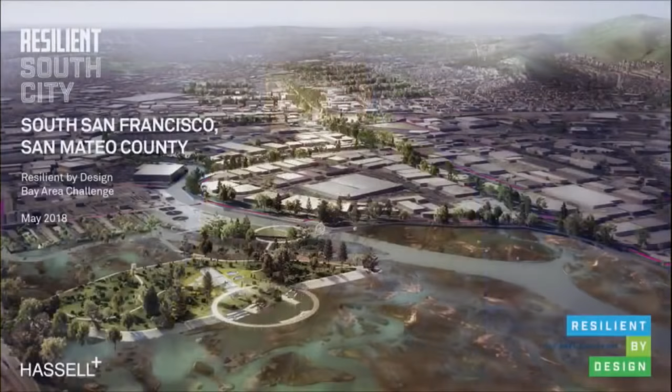We've come a long way. We've come a very, very long way over the last year.

I'm particularly thankful to our amazing team that's developed all the work I'm going to share with you today, and they're going to join me on stage for questions shortly, and I'll be throwing all the difficult ones to them. Also to some of my Hassell colleagues that are watching the live stream in Australia and also in our Asian studios today.

We have together been focused on achieving the inspiring vision that drew us to this challenge one year ago. That vision is really about innovative community-based solutions to sea level rise, severe storms, flooding and earthquakes. Design can only be really effective in these serious problems if it also is improving the daily experiences of people.

There's one team member that couldn't be here with us today because he's in class, and I'm going to let Sultan tell you a little bit more about the project.

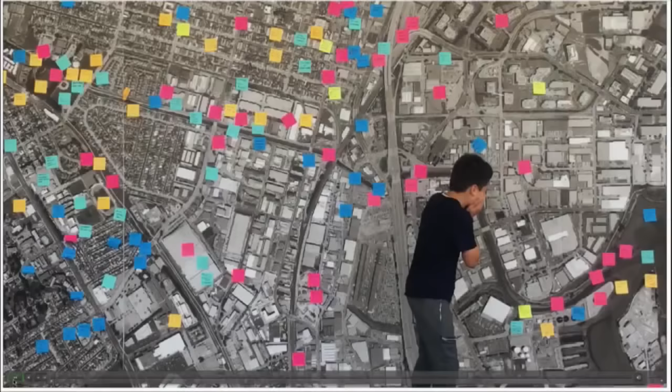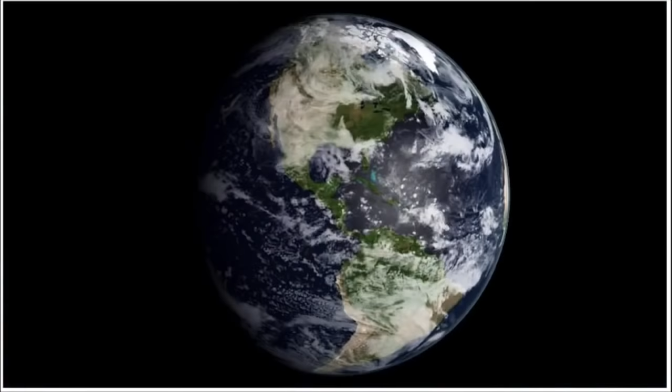This is a story about a little city called South San Francisco, built next to a bay a long, long time ago. A story about this city and that bay, but in a different time, when storms, floods, earthquakes, and other natural disasters were happening more and more often.

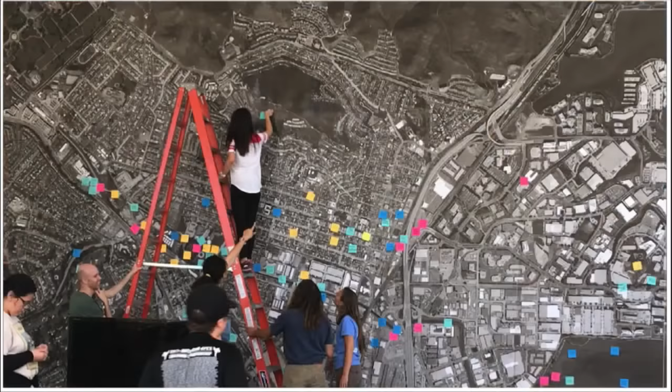A time that would call on all the communities that lived around this bay to share all of their past experiences and make plans for the potential disasters of the future. Together, designing ways to become more resilient, becoming resilient by design.

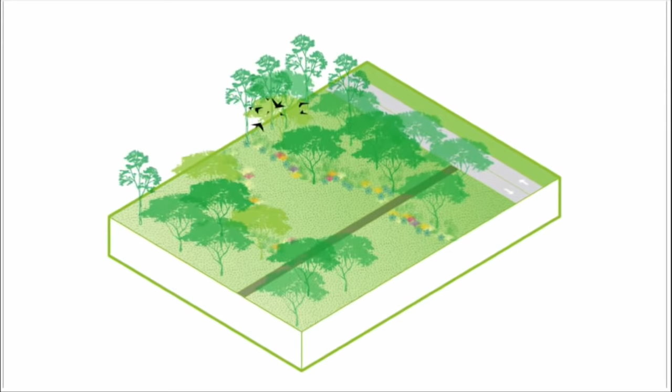And they discovered an answer so simple that they felt like they should have known it all along. The answer was something that they all loved, but sometimes forgot how valuable it could be. The answer was green, and kind of empty, and could be almost anything they needed if they put their mind to it. It was something that made their lives better today, and made them better able to respond to disasters in the future.

Although only one bay, its shoreline was diverse and stretched 500 miles, and at its edge had grown lots and lots of cities, some big, some small, but all connected by that one bay. And to find their solution, they first tried to better understand their shared problems.

So today I'm going to take you through the process, the collective design process that we as a team have been working our way through over the last year.

I'm going to begin by outlining our regional analysis, the process that we went through to understand the bay as a whole and some of the challenges and common challenges shared across the bay.

But then I'm going to turn to South City and the community there, the way that we engaged with them, the ideas that they gave us, the way that they contributed to our understanding of their challenges.

And then after that, I'm going to talk to two scales of the project. In dealing with creating resiliency in South City and Colma Creek, we've looked at the entire watershed, and we've also focused on the most critically vulnerable area, which is Colma Creek.

So we began this process with one of the most amazing site visits that our team had ever experienced. It was 4 weeks of a curated tour of exemplar projects around the bay and some of the most vulnerable sites and communities. And then beyond that was detailed data analysis, identifying some of the challenges brought on by climate change to communities around the bay.

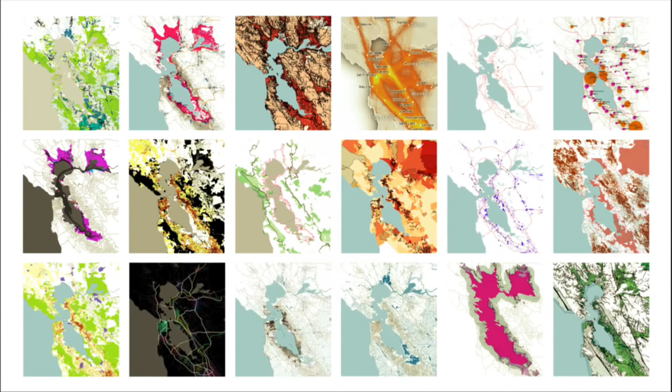But also identifying existing challenges to life by the bay, for some that will be exacerbated by rising tides. We've identified 4 key insights, and I'm going to keep them very short.

Firstly, it's creekside and shoreline areas that are vulnerable, and there's a triple threat: it's flooding, sea level rise, and liquefaction.

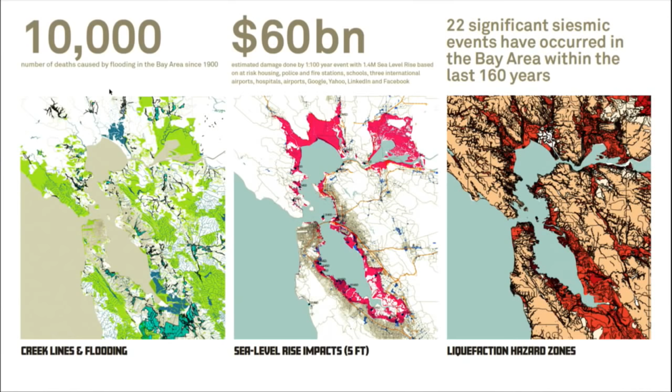So it's clear from the creek flooding FEMA maps, as well as the assets and communities that are at risk by sea level rise and the liquefaction hazard zones, that these 3 risks are all entwined, and they make areas that are particularly vulnerable based on that triple threat as I described it.

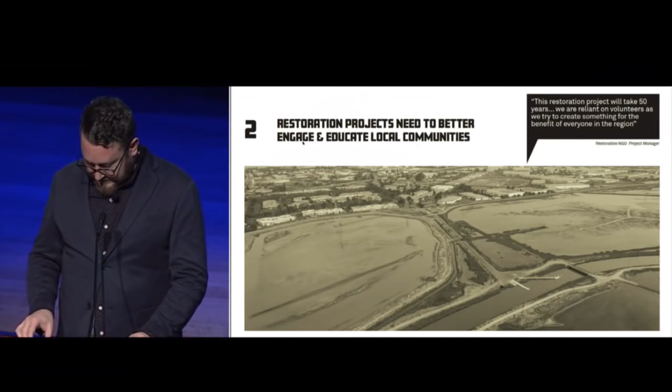Secondly, restoration projects need to better engage local communities and also embrace educational functions.

So we've talked a lot about the Baylands. This is a really ambitious project of a huge scale. At the same time, the population of this region is growing very, very quickly. And the Bay Trail is 500 miles in circumference, and it's really responsible for connecting those communities to that Baylands project. But if the Baylands project, which was created out of a social movement here, doesn't adapt to the new population that inhabits this region, then it will never happen.

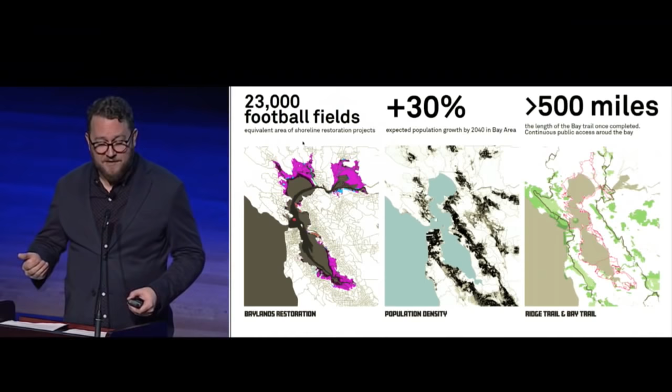And then on top of that, there's sea level rise to deal with. So for us, the key insight is the third one: there's a lack of parks and public access to the shoreline.

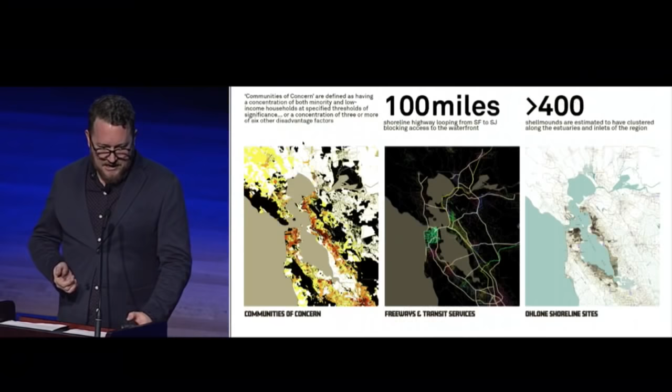It's really, really obvious to us as outsiders coming to this region. This is a key social equity issue. Access to public open space and access to the waterfront should be a right. And we can see that when we look at the most vulnerable communities that are along the shoreline, when we look at the transit infrastructure, the freeways that ring the bay. It's amazing that they're still there. And in a place where the first settlers of this region really understood the value of the shoreline, it's incredible that you've actually since then lost the number of valuable community spaces around the bay. There's much less than there was many, many years ago.

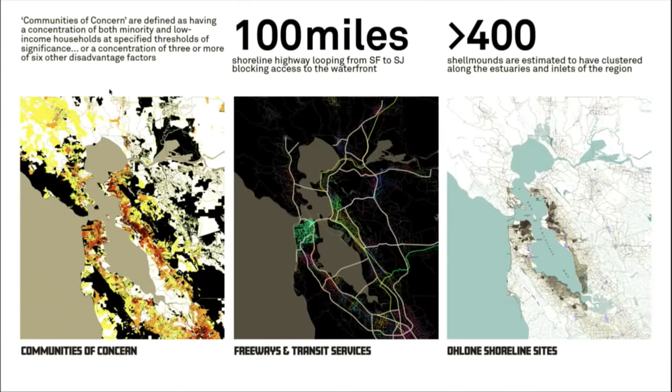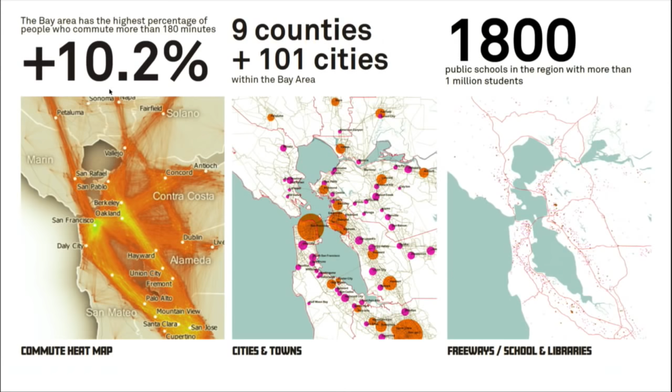And finally, this is a problem that's not going to be solved by regional governance. We realise that regional governance just is not able to lead the solution. It's a neighbourhood-led solution. It's got to be scalable, it has to be connected to transit, to open space, and build social resiliency. So even though people commute in a regional way, it's the diversity of cities that has to become the strength of the solution. It's the diversity of communities, and it's building on the fine-grained neighbourhood assets like schools and libraries.

So as Sultan mentioned in the video, the Bay Area is no stranger to disasters. We've got floods, drought, earthquakes here. We've also included tech companies starting up. That's technically not a disaster, but it's certainly a disruption. But have our needs in disaster really changed that much from 1906 and the earthquake to last year's North Bay fires? We would argue that they haven't.

We would argue that people still need space. They need space to take refuge, to look after each other, and to regroup. Public space is critical. And sadly, we don't make as much of it as we used to.

So we've started by looking at the existing infrastructure patterns that happen around the bay. The freeways, the public transit, the priority development zones, they're all loops, like a circuit formed around the bay, vulnerable to breaks in one point. And we've looked for opportunities to create new public space on the shoreline, in the town centres and uphill. And that space is there to collect people, to collect water, and for use in disasters. But it's also ecological space, as I'll get to later on.

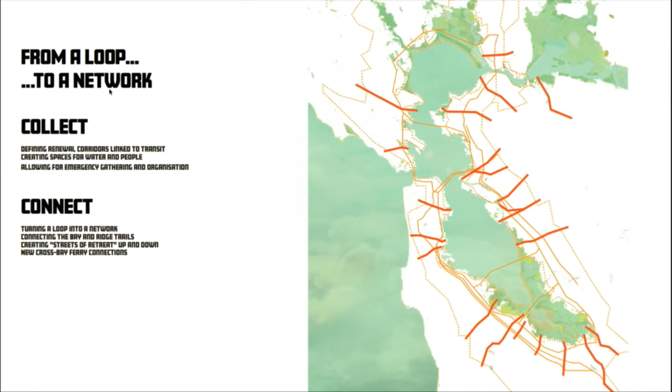And then we've looked to opportunities to connect these spaces from the ridgeline to the shoreline. So we're looking at key streets, community streets, we're looking at creeks, and really opening up those connections in order to create a network, a single resilient bay-wide network from neighbourhood projects all the way to something singular that joins us as a region.

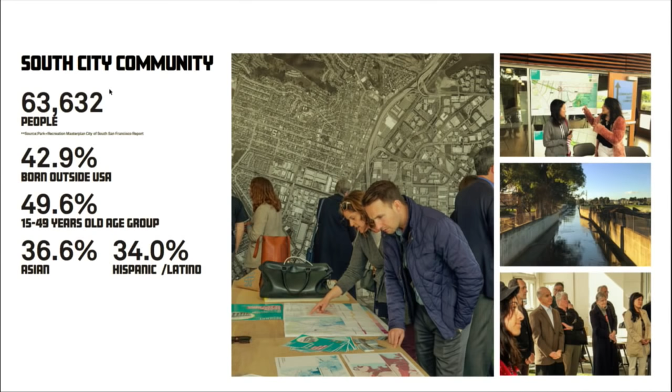So South City, well, it's a unique place. It's a small community, but it's typical of some of the smaller communities and growing cities in the region in some of the challenges it's facing. 43% of its population were born outside of the US. It's adjacent to the region's largest airport. It's also home to some extremely vulnerable neighbourhoods, particularly within the downtown area. So it's a place balancing a strong history and also rapid change. And it's a place that's very much was ready for a community conversation about these issues.

So that's what we did. We took an old building, a 100-year-old building in the main street, and it had been empty for 20 years, and we opened it up 5 days a week, sometimes 6 days a week. And we allowed the community to drop in to learn about some of the research that we'd done, but really to help us to learn about some of the challenges they were facing and to help us kind of shape the project day by day.

And we built something together. We covered the main wall in a map, and the community filled that wall day by day with their comments, suggestions, hopes and dreams. From local youth to business owners, people were incredibly open and generous with their time, and they became engaged and invested in the design process for a project they didn't realise was possible.

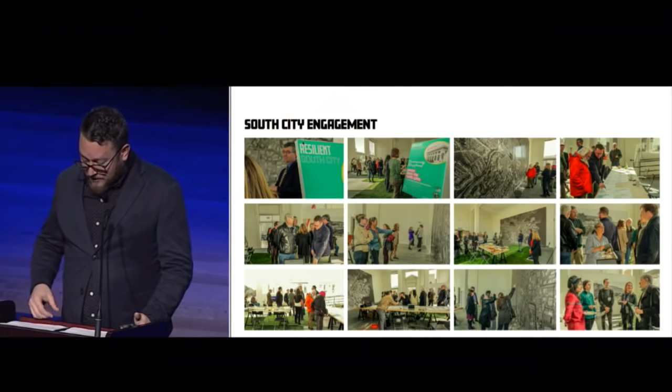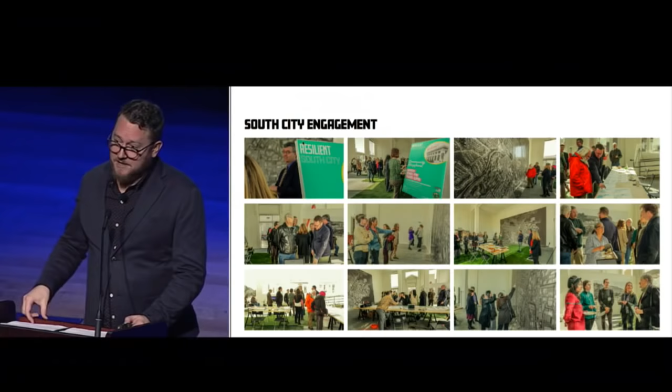So we opened the doors of that space in a public event back in March. We also then kept them open for 2.5 months, and we had a range of events and made the space available to community groups. We worked in the space ourselves—it was a design studio as well. And we hosted all of the stakeholders for meetings there, with the community comments on display permanently right next to those meetings. There were quite a few stakeholders.

We held dozens of meetings there, but we also worked very closely with the city and the county in our working group, and we're very thankful to their input throughout the process and their support.

We'd like to acknowledge 3 key community partners that worked very closely with us. The South San Francisco Historical Society filled the space with historic maps and photos and stories from local residents. The Youth Leadership Institute, every Friday, brought South City High students into the space where we talked about environmental justice, planning and equity, and also active mobility.

And lastly we'd like to thank the San Bruno Mountain Watch, who filled the space with plants that were native from that watershed. They also took tours of local high school students from the mountain, looking down on the watershed all the way down to the shoreline, and then came into the shop front to fill the map with suggestions.

So Ariel Chabowski's here today, and he's going to join us on stage afterwards for questions.

But this whole process is essentially about people. It's about their stories, and about their stories revealing their challenges, but also their aspirations. This is a pretty grim competition or challenge in some ways, but it can also be pretty optimistic in terms of the change that there's potential for here.

We didn't want one-off community meetings. We wanted to embed ourselves in the community. We wanted to really draw out these stories and then have them inspire our process, and they added depth to our analytical research.

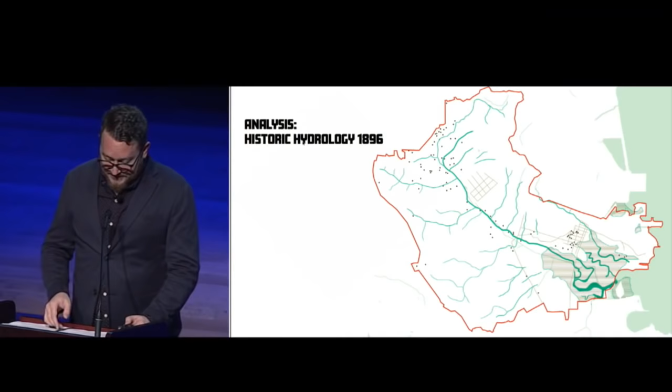So the city was originally built at the turn of the century next to a marshland that connected at the bottom of Colma Creek to the bay. There were a number of wells built for access to fresh groundwater as well, which are those dots you can see. An entire watershed between San Bruno Mountain and the San Andreas Fault drains to a single creek.

This is a huge area, and there's very unique geology here, which means that those wells have led to a much depleted aquifer, and it's actually quite hard to put water back into that aquifer because only certain places are possible. So we're not just making bioswales anywhere—it's much more complex than that in the Bay Area.

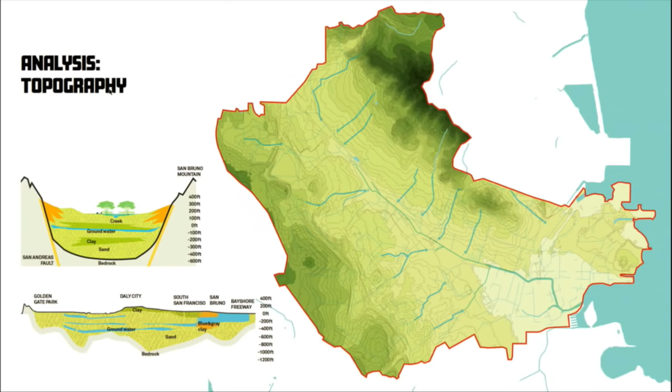A number of cities drain into the creek, and today those cities have a rough balance of jobs and housing, or jobs and residents, but in true Bay Area style, people don't live and work here. So they all experience long regional commutes because of a skills mismatch between the industry and the residents.

But interestingly, around 70% of the trips within South San Francisco are only 5 miles. So this is a place that's small enough that could have a kind of walking and biking lifestyle, and that's something we saw as an opportunity.

And it looks like a green place, but it's not, because the green space is not usable. What you see here is the mountain, the San Bruno Mountain, which is not typical recreational space, and then you see a huge amount of cemeteries within Colma, and then you see a golf course. So the one park, which is kind of on the creek in the centre of the image, much beloved Orange Memorial Park, is really all there is.

And South City people love their sports. They are very, very keen on their baseball, on their soccer, and also on their community swimming pool. So this is kind of why it's a real problem that when we compare to other cities in San Mateo County, they do not have enough sporting facilities. They also have some of the higher rates of youth obesity in the county as well.

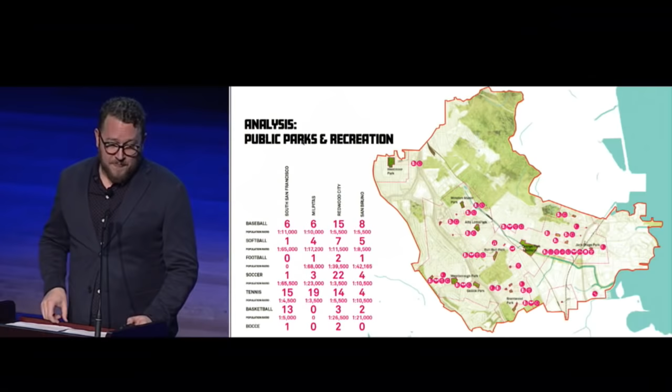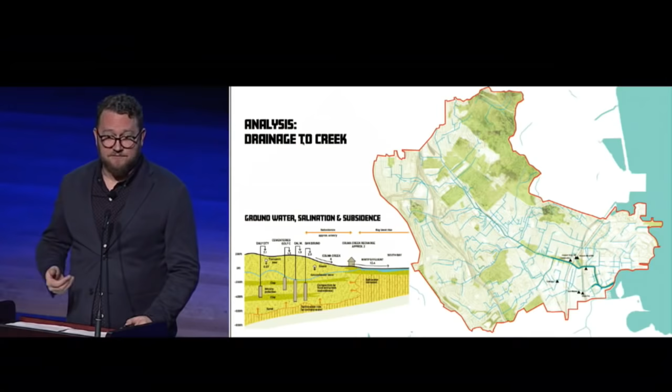As the stormwater system's grown without green space within this water catchment, there's been more and more water going into the creek. There's also been groundwater being pumped at the same time, and the water treatment plant puts out around 7 times as much water on rainy days than dry days, which tells you there's a risk of subsidence from water being pulled out of the ground. And all of this water on the surface is essentially funneling down towards the lower creek where it stops.

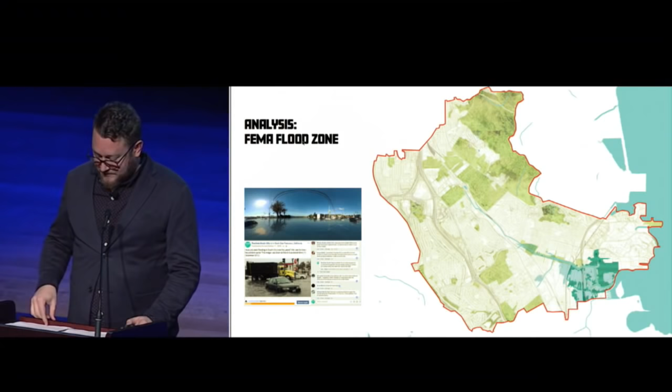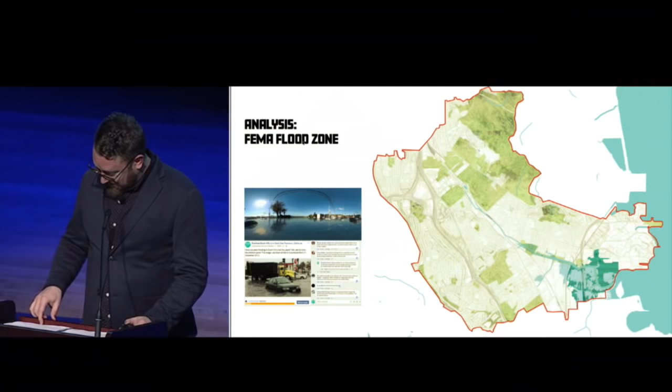The community had lots of stories about flooding. Everybody had a story about losing a car. Different years, slightly different spots, but always at that point in the lower creek. And that's the same point where the town grew over the marsh, as you remember from earlier.

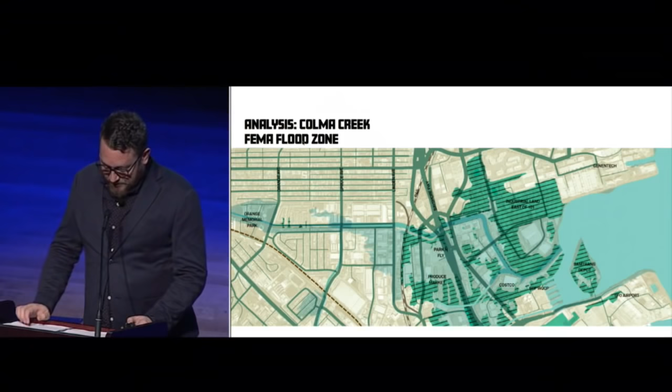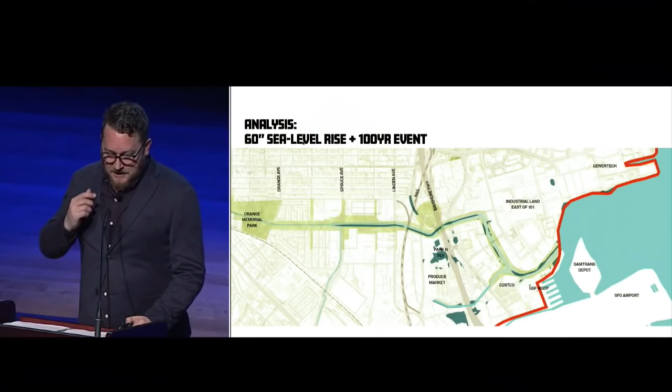This area is the city's most vulnerable. It's also home to some key urban functions, and you can probably see them better on this map, where you can see the biotech hub, the world's third biggest biotech hub, with Genentech on the north side of the creek. There's SFO Airport, there's Produce Market 101, the Caltrain. There's also lots of local assets, Costco, the local water treatment plant that's treating water from several surrounding cities.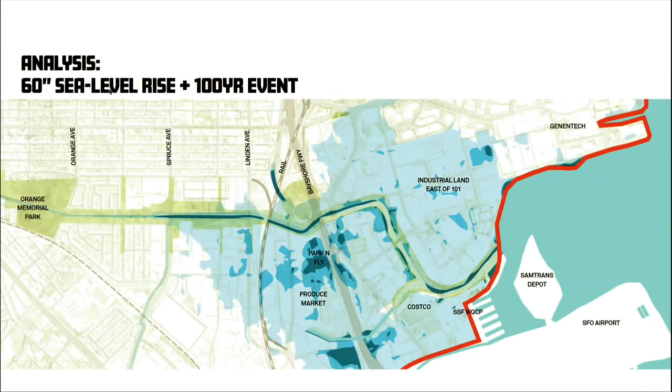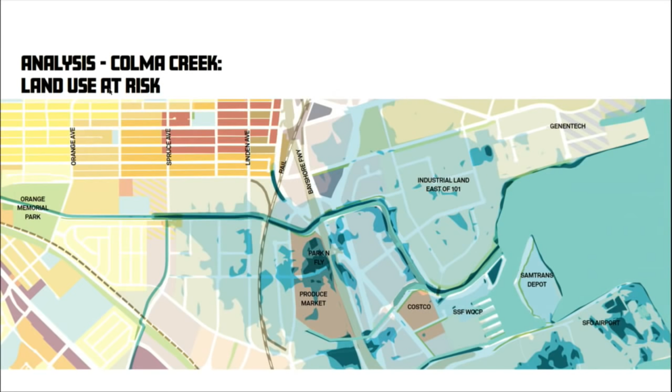Aside from the FEMA flood zone, there's also the sea level rise risk and liquefaction as well. So when we look at the land use in these areas, it's primarily industrial uses at risk, some associated with the neighbouring airport, some potentially important to the growing biotech hub as the last land available there, and some the industrial employment base, important for this community known as the industrial city.

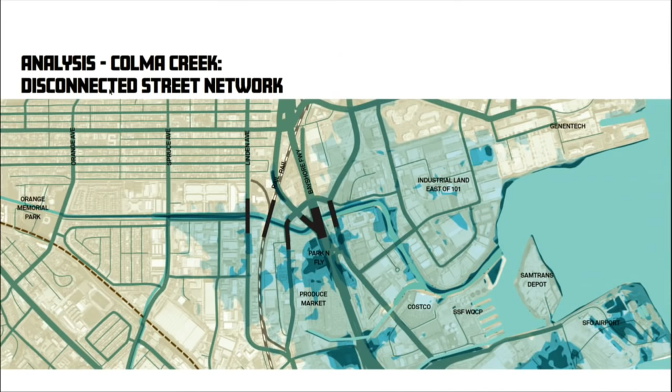There's no east-west access across this corridor. There's the highway, the Caltrain, a number of streets blocking people walking or driving across this corridor. And you can understand how constricted it is when you look at the water flow, which we've done.

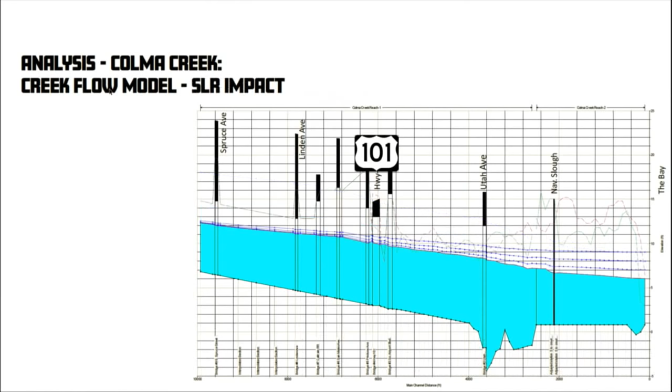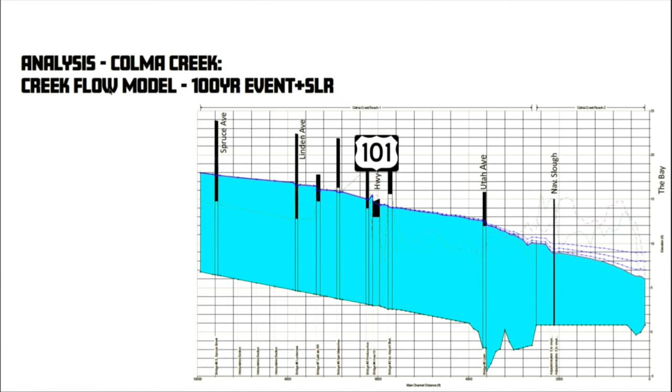So it's a complex problem, and that water flow model, as well as the many community observations, have helped us understand it even further. But as Sultan explained, when we get to our solution, we think it's a relatively simple and understandable principle: public space is critical to resilience, improving the daily lives of communities, as well as allowing them to respond to disaster.

So if we look at all of the green space and public open space that we can access, we start with the parks, but then the key opportunity we found was the schools. So extending our catchment of people that can walk to a community space, building on the Parks Department in South City, who already use the 2 high schools for programming of sports that can't fit in the parks, but taking this further.

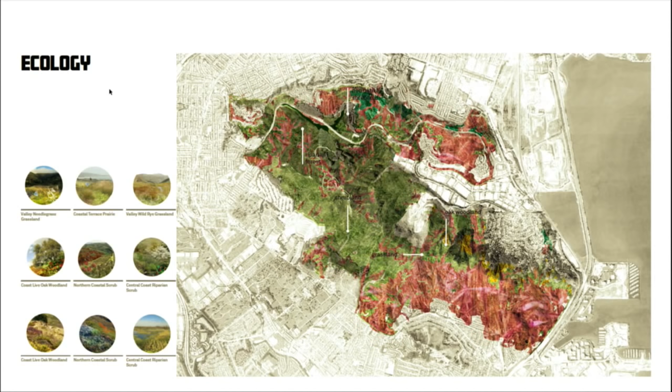I mentioned Ariel and the San Bruno Mountain Watch. They've done incredible work restoring the mountain's ecology. And we want to build upon this and extend it down the entire watershed all the way to the shoreline along the creek, building huge awareness about resilience through native plants and plants that are very specific to this local area.

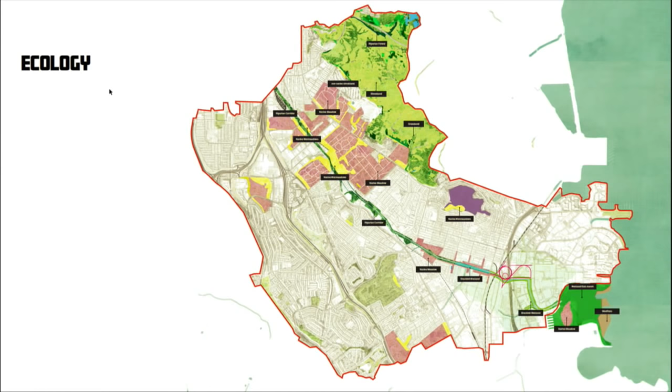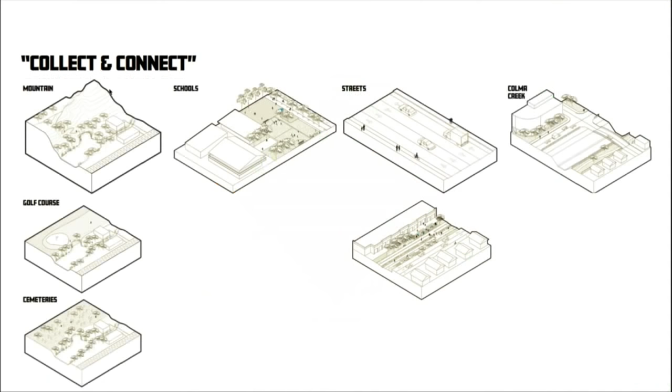So what we establish is a network, a resilience network that collects and connects layers of water, ecology, community, and emergency. The collectors are parks and schools, and the connectors are green streets, adapted freight corridors, and a new Colma Creek. And there's all of these key places that we've looked to create adaptations across the watershed.

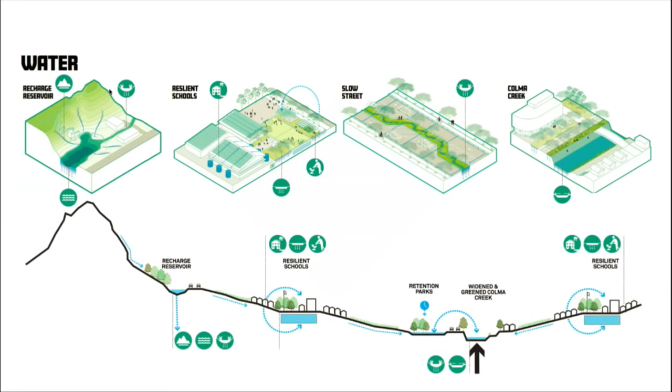But they happen in 4 separate layers. So firstly, with water: collecting and recharging at points of suitable geology next to the mountain, collecting, treating and reusing at schools, slowing it down in the streets that run to the creek where there's existing pipes, and discharging into creekside parks to try and infiltrate or overflow into a widened Colma Creek.

Recharge reservoirs, we think, could become gateways to the mountain. The learning hubs could be the first place that some South City kids really come in contact with nature, and it really draws them up into that mountain as a kind of backyard of nature play. Then ecology.

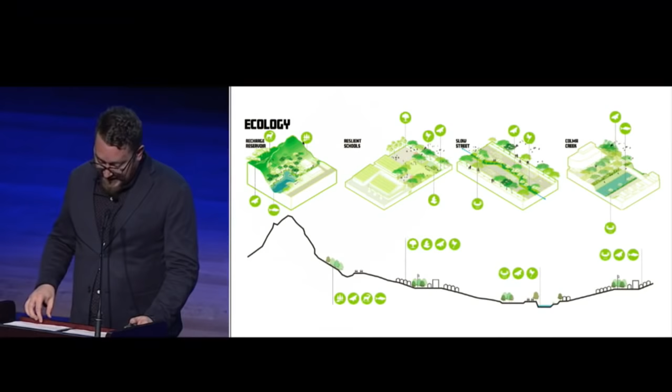To restore ecology, further habitat for the mountain's mission blue butterfly, bringing natives into the schoolyard, local streets connecting as ecology corridors between the schools and the creeks, and steelhead trout returning up restored Colma Creek.

For us, this is really critical. This is both a natural place, but it's a social place. And sometimes in this region, those things butt heads, but it's really important that we try to find ways for them to fit together.

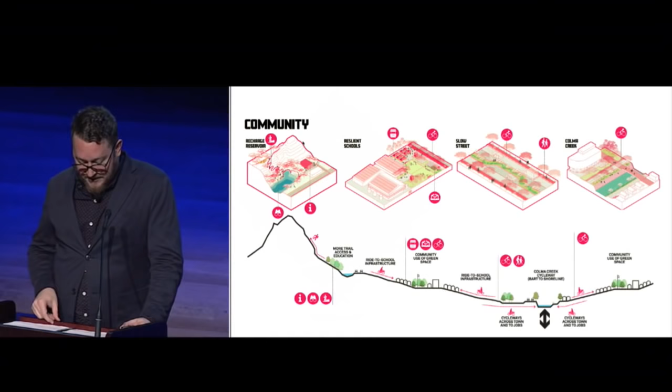And places for community to come together for education or exercise in nature, utilizing school grounds over more hours to connect people with their neighbors, and to connect kids to their schools for a safe ride, across town or along Colma Creek. So adapting streets to safe and shaded routes to school. These are short distances. It could really improve health.

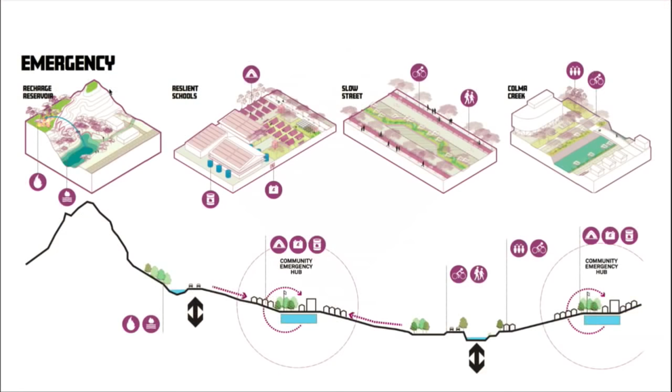But it also gives people a connection to future points of emergency access. The schools are a real asset as emergency hubs that could be adapted. We're working with existing programs in the city and the county about taking refuge at schools and having people know about those refuge points, which they don't at the moment, and also understanding the capacity of each of those refuge points. Opening up those schools to recreation at times when they're not in class is really key to building social connections that enable this to happen.

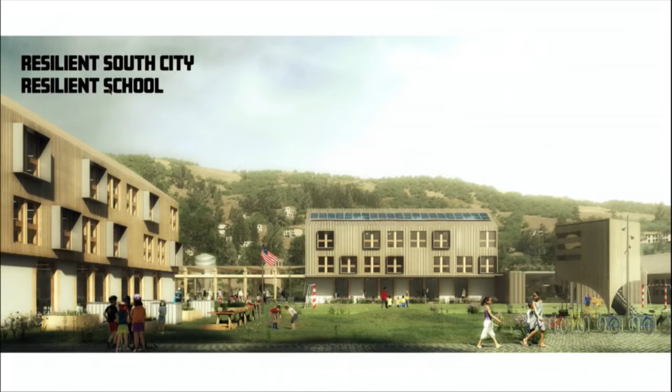And this is what they'd be like. There'd be places with access to water, energy and other emergency facilities, but they'd also be implementing and building bridges between the school district and the city as well.

So a network that's all aimed at building connections, access to resilience for people across the entire watershed, but it's also aimed essentially at stopping water from going into the creek, or at least slowing it down.

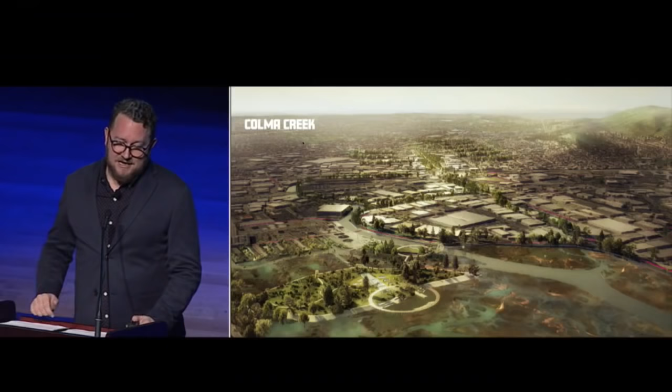So if we get to our key vulnerable corridor, it's a place that everybody knew about and they all talked about, and our idea is about turning a point of vulnerability into potentially the biggest opportunity.

We imagine Colma Creek as a continuous restored green corridor of connected projects, anchored at one end by the much beloved Orange Park and at the other by a new public open space destination on the bay, reconnecting the city with the bay. We've proposed a singular public corridor for walking and cycling from park to park, from pool to pool, reinstating the lost micro-delta connections as easements and all connections both for water and for people.

So it begins with an upgraded Orange Park. This is built upon the city's existing master plan for extended sports facilities, so new soccer fields, new baseball fields. It's also building upon work being done by our team members Lotus Water and Brown and Caldwell, looking to treat, store and reuse creek water, which is being funded by Caltrans because that's runoff treatment mitigation.

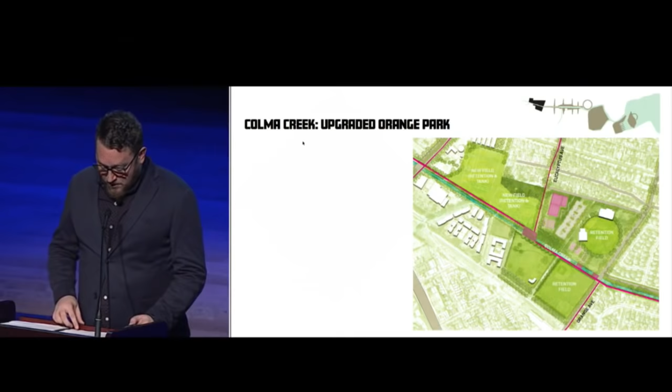But further to the plan, what we're proposing is just a simple gesture of lowering those playing fields. Three feet lowered in one baseball field could potentially save a road or a number of industrial properties downstream, and it's something we've started to talk to the community about.

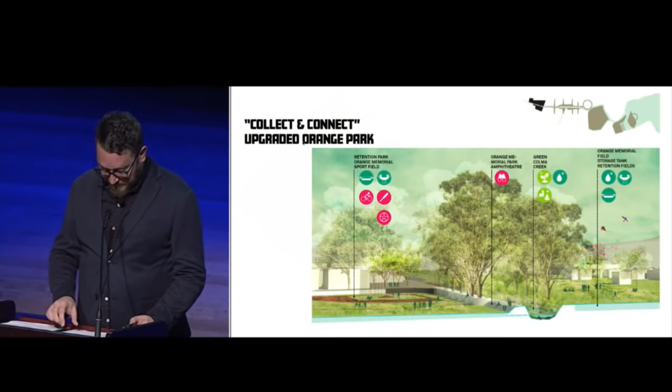The second project is a widened and greened Colma Creek. So through the removal of North Canal Road and lowering and extending Sister Cities Park along the creek side, we're utilizing industrial plots on either side, which are already earmarked for rezoning in the short term, to deliver mixed development that would set back from the creek.

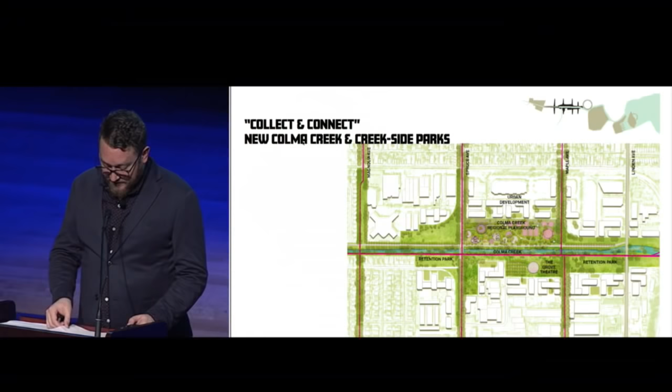So working with existing landholders to exchange rezonings for public benefit, convincing the city to say do not rezone this land into residential until we can allocate the portion next to the creek for public space.

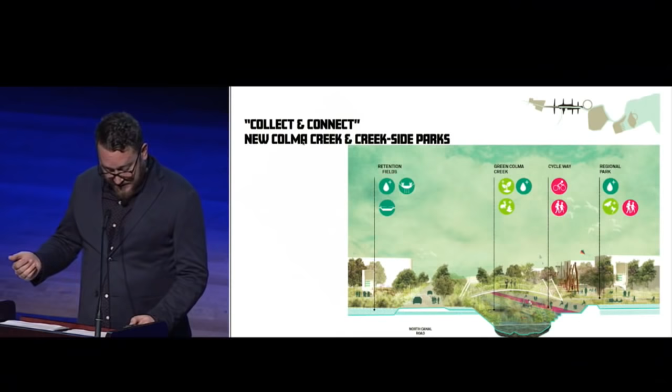And a relatively simple project, widening the channel to increase capacity whilst also creating a continuous safe cycling route, taking down the walls, greening the creeks, bringing native species through this corridor, and really turning South City back towards its creek. It's a place that the city's turned its back on. We're proposing that we turn it around.

And then at the 101, we're overcoming major infrastructure blockages with an iconic pedestrian and cycling loop. It's formed by remnant freight lines and easements. It's a connection over the rail corridor, the 101, and multiple roads, but it connects the city to its Caltrain station, which is stuck within this island.

It also connects the employees and workers over on the east side in the biotech hub across to the city to come spend their money. And it creates continuous access along the creek.

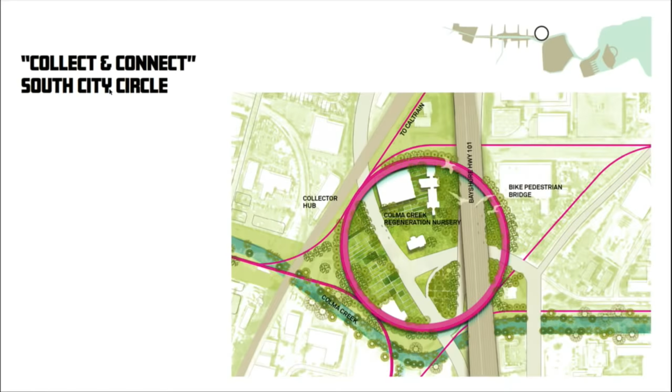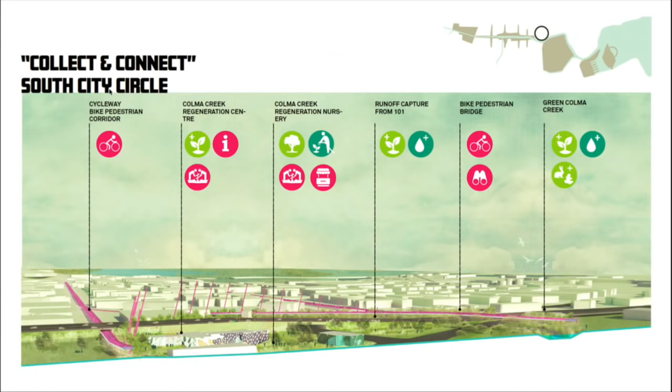The idea is that it would be funded through a joint benefit, a partnership with Caltrans, to create a floodplain for the water in the creek that can't get under the 101, but also as natural treatment for runoff coming off that highway. It's also a partnership with the community to create a nursery where all of those restoration plants would be hosted, and a gateway to the city for people to understand what this project is about.

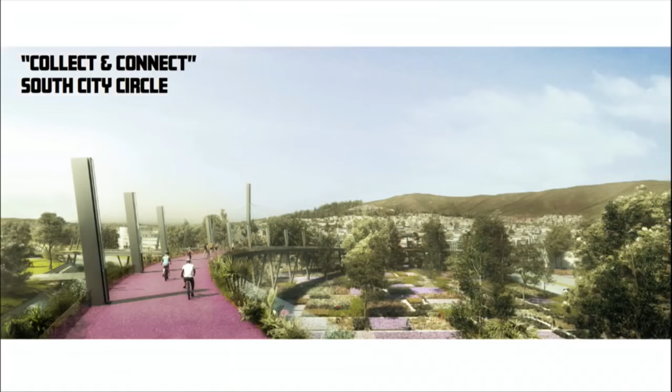It's an iconic project, but it's also hopefully a daily experience, and we imagine people simply riding their bikes from the park at one end all the way down to the bay and the pool at the other end.

So working with the county, the airport, and this water quality control plant at the bottom of South City, we've developed a plan for a new eco-water park — a place of ecological habitat creation, natural final stage treatment, water education and water recreation.

It's a new public space on the bay for South City and for the region, and it's a critical point of the watershed where it meets the bay.

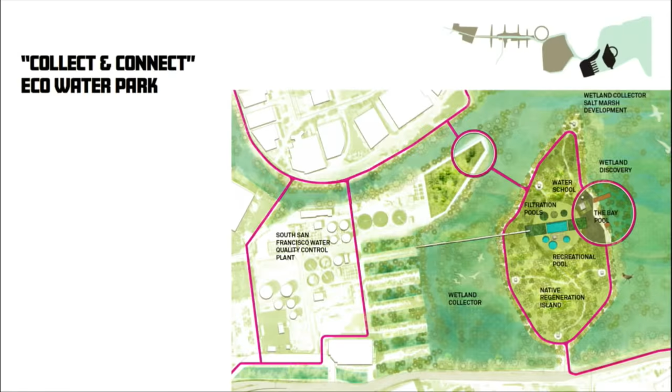So it's an opportunity for natural treatment and emergency storage for the treatment plant. It could be funded through certain environmental grants associated with that, but it's also an active public shoreline destination for the community. At the moment it's a bus depot right on the bay.

What a shame. This is such a great opportunity for people and for this community to get in touch with the waterfront, and also to engage in this conversation about adapting to sea level rise.

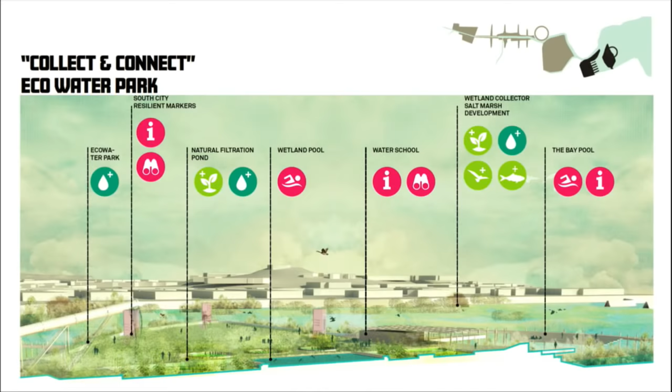And you can swim in the bay. That would be amazing. That's what really motivated us.

Imagine in another 50 years a South City child telling the same story that Carl told. It seems a long way off, but to us we think it's quite achievable.

And then finally, the double threat that people have been talking about — stormwater release and also sea level rise — is a key concern. In the long term, we're looking for a solution that balances that extreme stormwater and sea level rise at the same time.

This is wetland restoration in the short term, but eventually a living levee, and a storm gate. So what we need to do, we think, is build capacity for stormwater to be held within this area when we get a future king tide.

And it's a key area of concern to the airport as a critical partner to this project. If this doesn't happen, they've said they may have to look at building a barrier on their inside edge.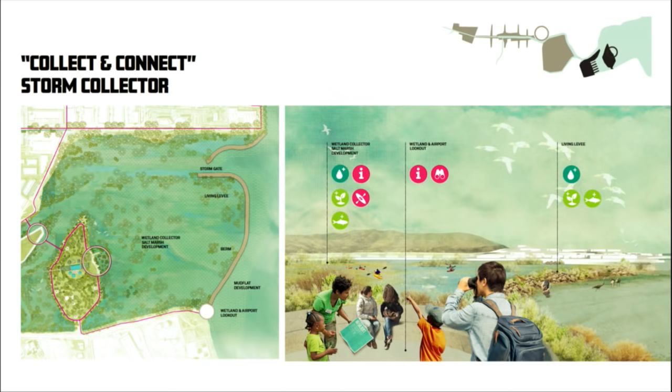So they're already building a barrier to the bay for sea level rise, but this is the kind of second stage of stopping that fluvial flooding coming over onto the backside of the airport — actually stopping the airport from having to cut themselves off from the community.

So it's habitat, it's water management, it's education, it's recreation — it's all these things coming together. But it's a public place for people by the bay at the end of a greened, restored, connected corridor.

We believe that this small little city could have a massive impact on the bay, both through the scalability of this project for other troubled creekside communities, but also because of the direct impact a small city can have on the gateway to this entire region right next to it, or to this biotech hub right at the shoreline. We cannot separate neighborhood projects from regional infrastructure, but we have to start from the bottom up.